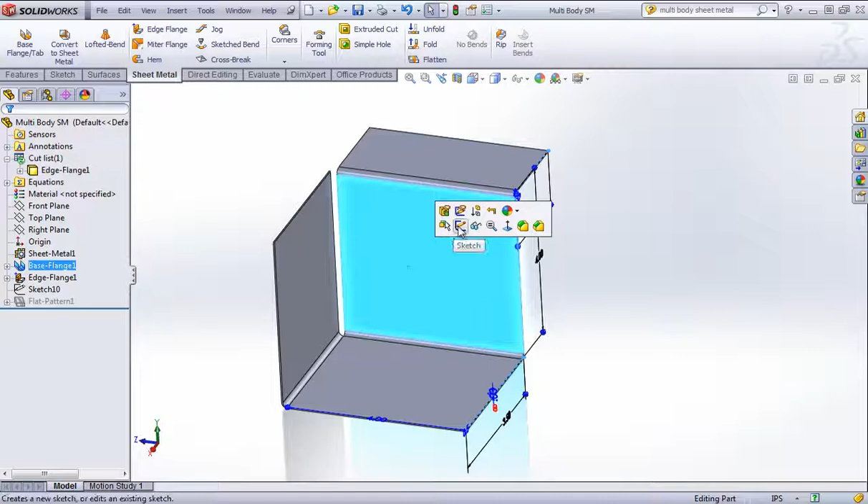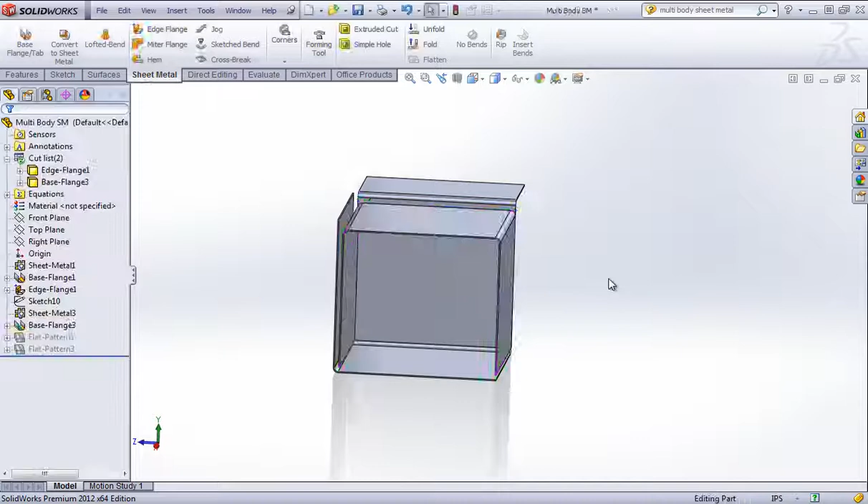To start, I'm going to create a quick sketch on this face, and then I'm going to create a base flange tab. Depending on the geometry, SOLIDWORKS will figure out if you're trying to create a base flange or a tab. If it is a new base flange, this is going to go ahead and create a new body, and you'll also notice multiple flat patterns at the bottom.

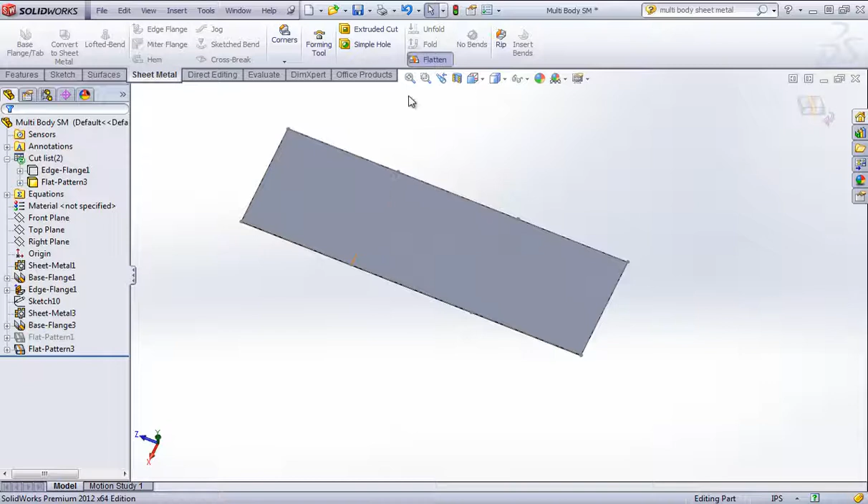You'll notice the flatten is grayed out as you have to select a body or a flat pattern to flatten that out. The other body will be hidden when you go into the flattened mode.

Like I was saying earlier, if I were to create a tab, or if I were to create a geometry that looks like a tab to SOLIDWORKS, it'll look to merge the result and be part of the same body.

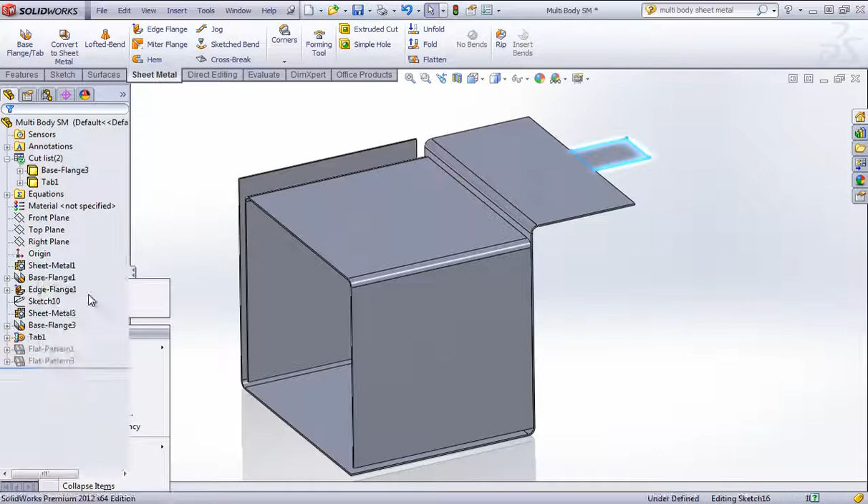With that tab, we can also uncheck the merge result and create a body of its own.

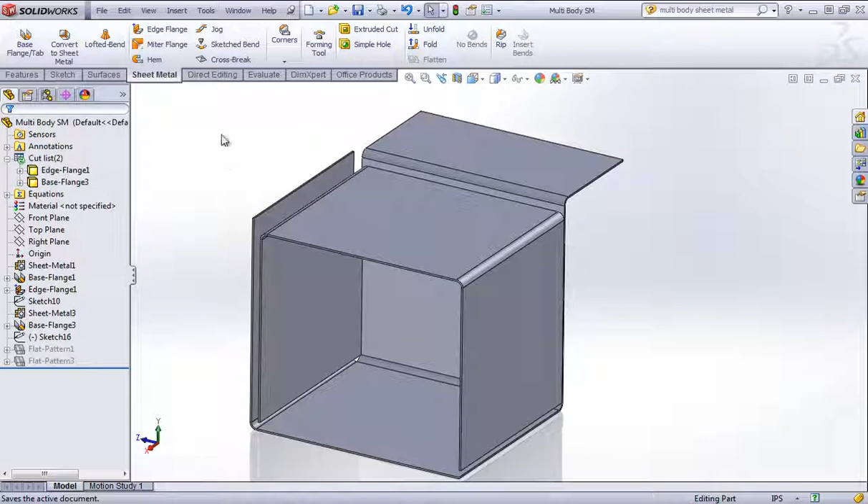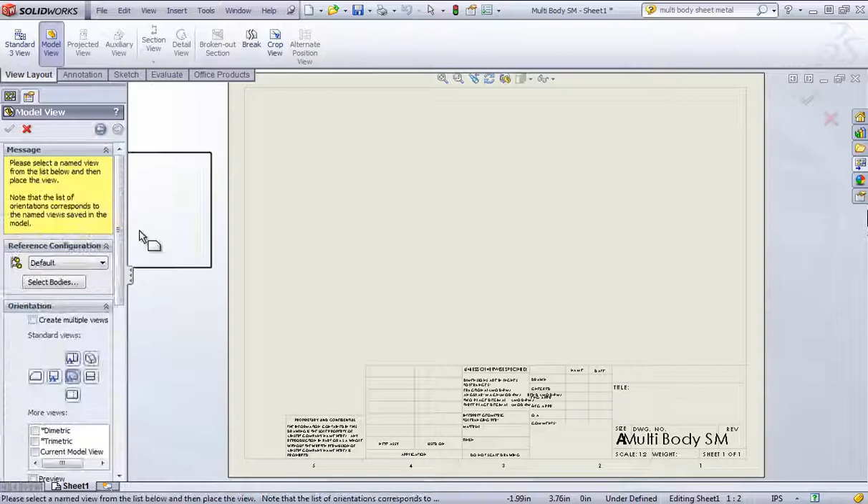When working with a multi-body sheet metal part and bringing it into a drawing, we're going to have to select a body before we're able to access the flat patterns. Whereas we were able to access flat patterns from the left, now if we go into model view, we'll first have to select a body, and that's going to bring you back into the part.

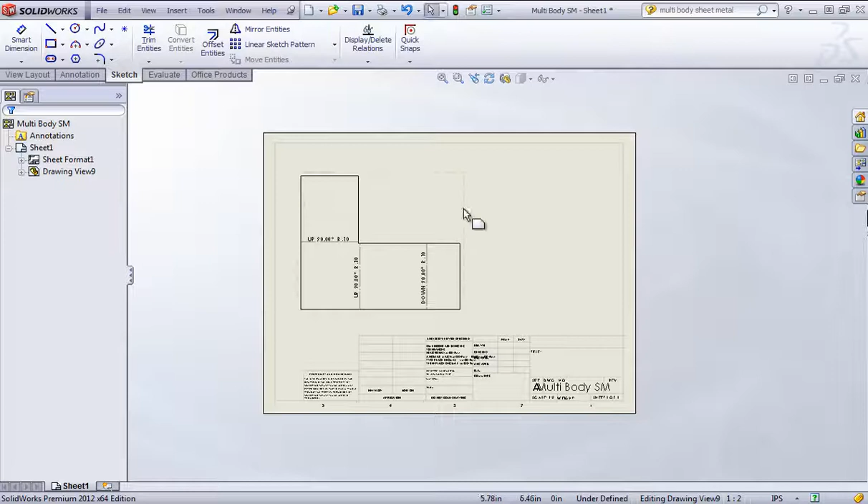Then within the more views options, we can choose a flat pattern. So just remember, with the multi-bodies, there's going to be that extra step of selecting out the body before you're able to add in your flat pattern to the drawing.

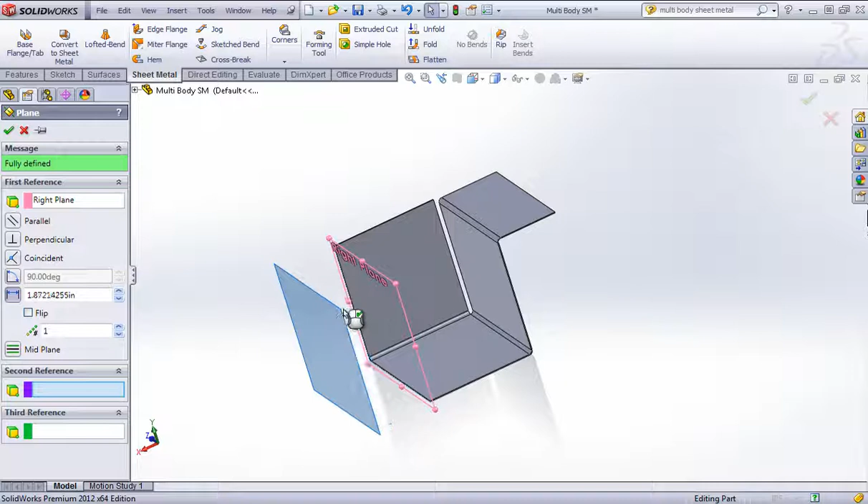I'm going to go ahead and delete out this extra base flange, and I'm going to drag out a plane from the right plane and set it off by some distance. And I'll go ahead and create a quick sketch.

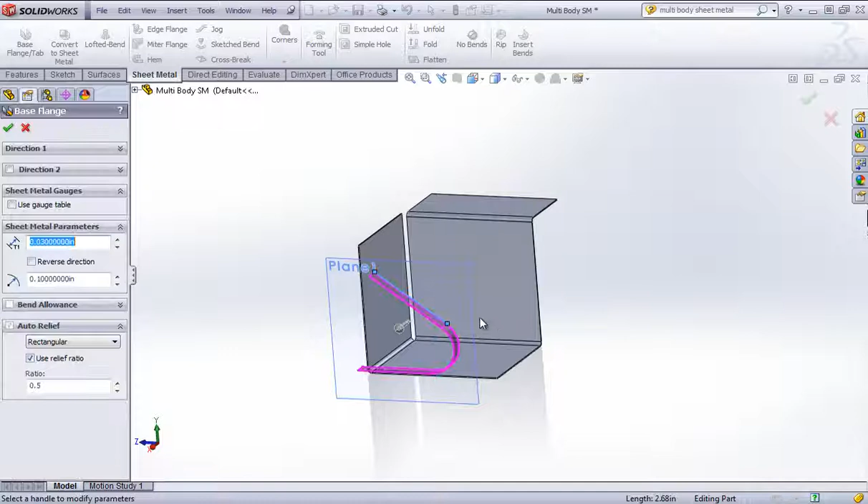And once again, if I were to create a base flange from this feature, it'll create another flat pattern and another sheet metal body.

We can do this with the base flange tool, the convert to sheet metal, the lofted bends, and we can also do this with an insert bends.

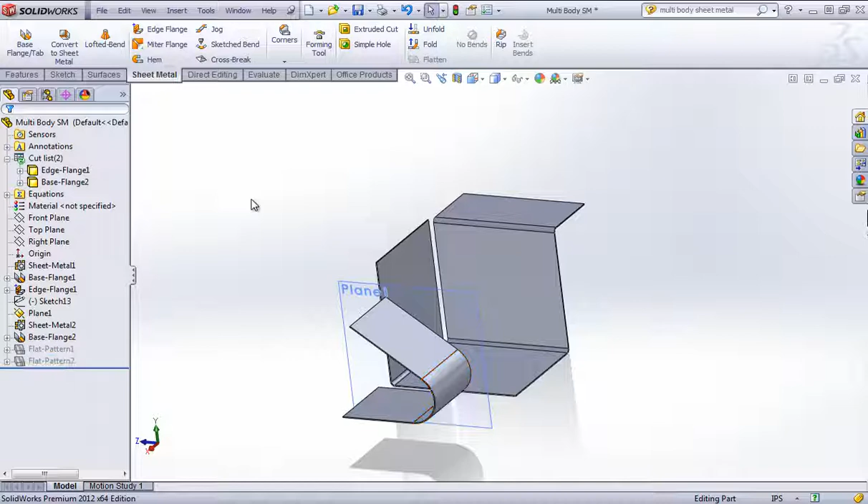We can also create multiple bodies in this part by mirroring as well as splitting the part. The difference with those two features, the mirror and the split, is that we won't get a sheet metal feature or a flat pattern. So you'd have to add in an insert bends or convert to sheet metal after the fact.

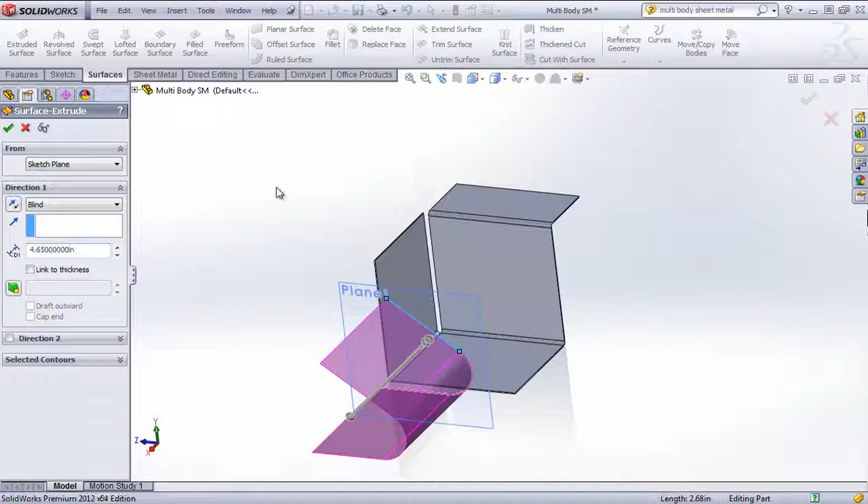One thing to keep in mind with using the convert to sheet metal option is that, for example, if I have a body or a surface that I want to convert over, if I use the convert to sheet metal option, that's not only going to change this to sheet metal, but that's going to update the radius in the other body.

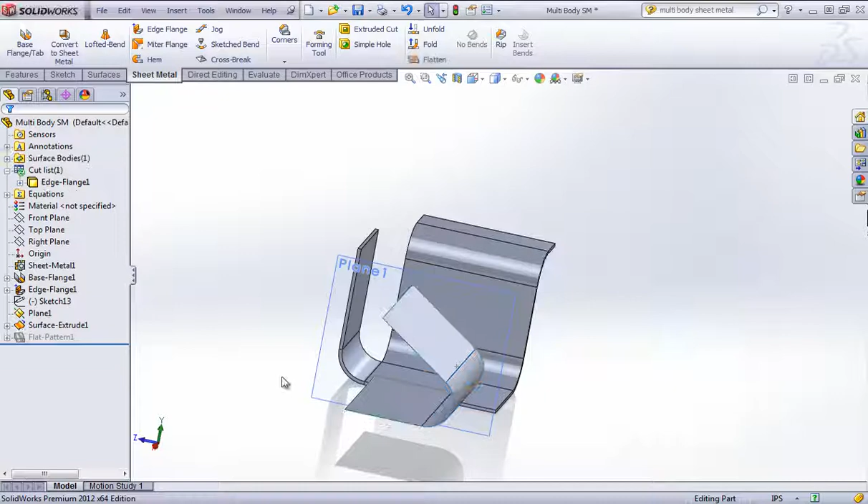So just keep that in mind if you're using that method to create multiple bodies. To modify this back, we would have to go back into the base flange and change that radius.

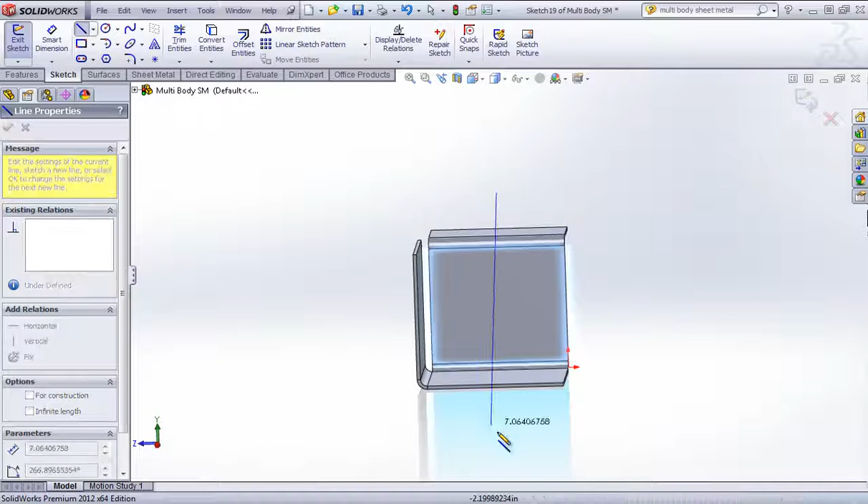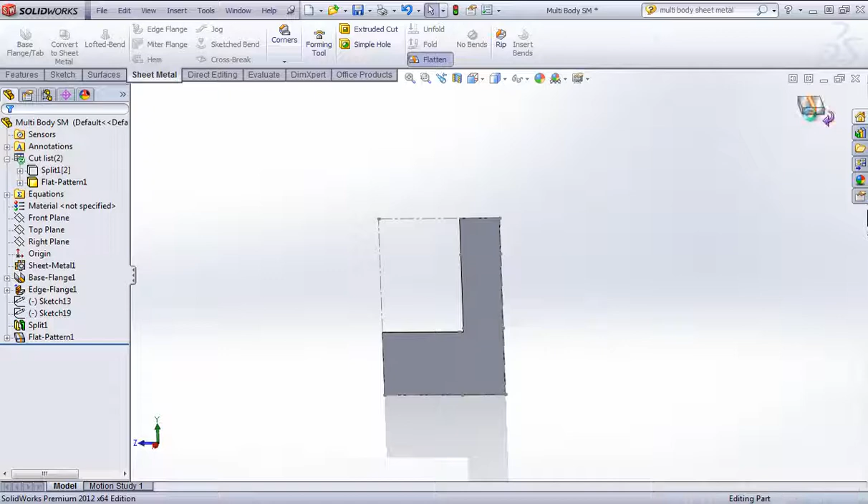As I stated earlier, we can create a split feature to create multiple bodies as well. But that second body isn't going to have a flat pattern. And if I try to insert bends onto the split feature, it'll say no bends found.

So that split option is generally only useful for working with the bodies themselves and not working with the flat pattern.

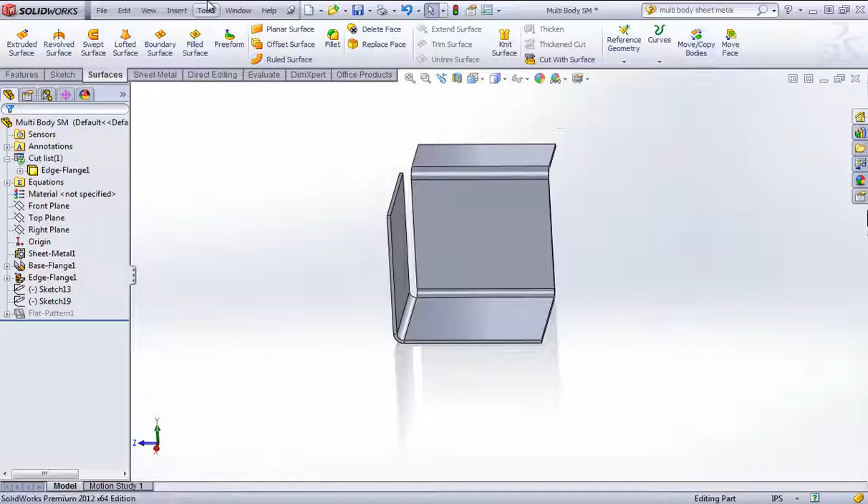We can also create multiple instances or move the body itself by using the move copy bodies. I have this added into my surfacing tab, but you can find this in the features and move copy.

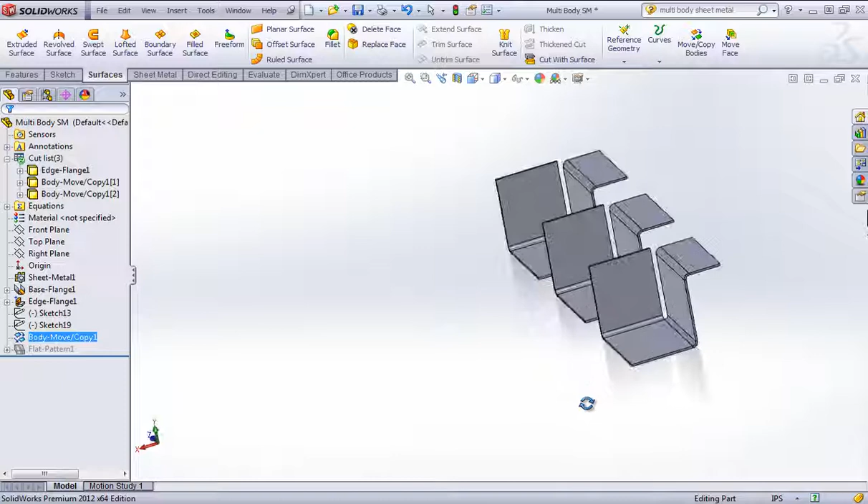So if we translate this over, we can create a copy or multiple, or simply just move the original. And we could also rotate this if we wanted.

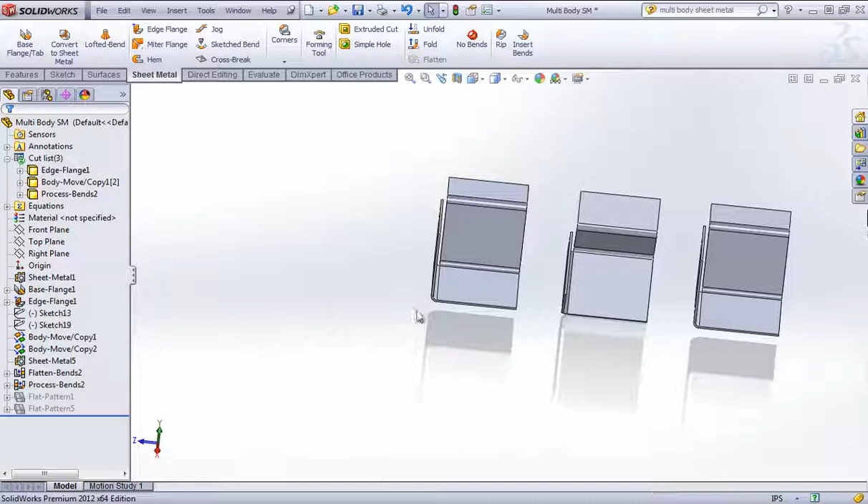One nice thing with the move copy body option is you're generally able to convert this over pretty quickly. So if I just choose the insert bends and these two faces, I now have a flat for each of these items.

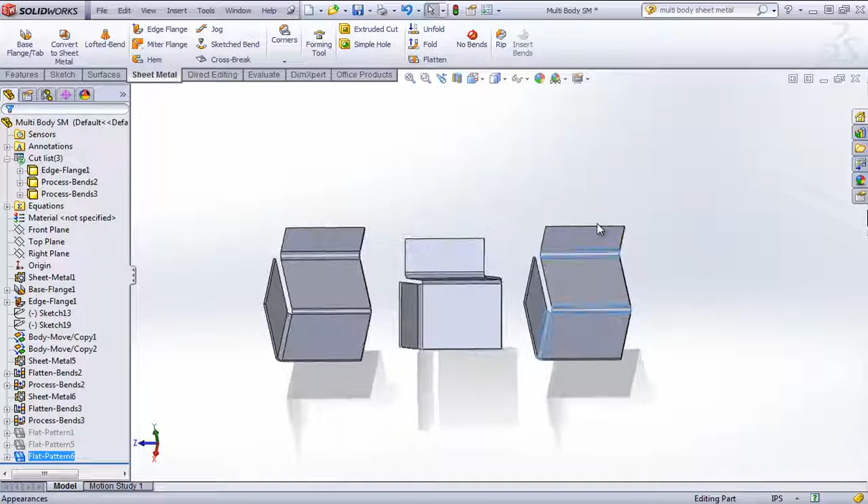If you are producing identical geometry, typically you won't need the flat pattern. Where this will be useful is that if you want to come back into the newly created bodies and add some features or add some edits.

But you can use multi-body sheet metal parts for quite a few things. I'll go into more detail in the enclosures and examples sections.